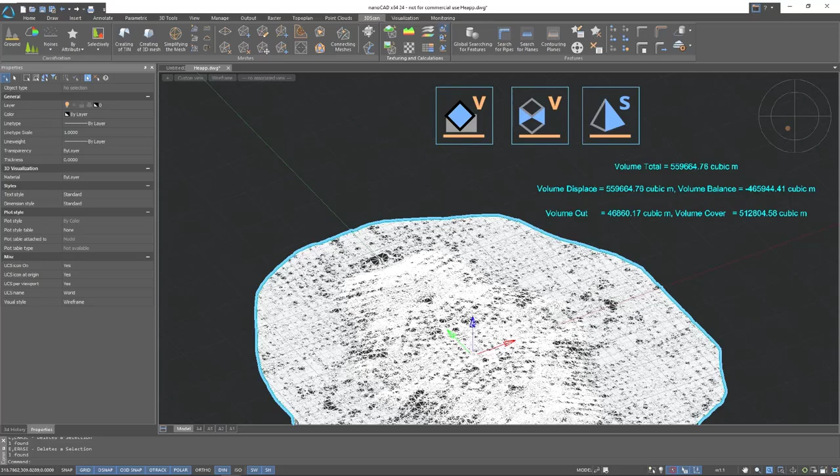Hello everyone. In this lesson, we will look at calculating volumes in 3D Scan.

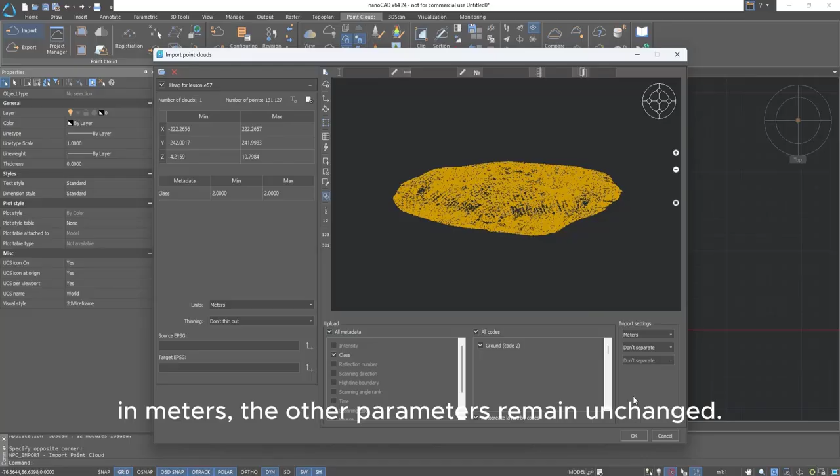First of all, let's import the file I prepared for this lesson. Let's specify that the cloud will be imported into the project in meters. The other parameters remain unchanged. Before we start calculating volumes, we need to build a TIN surface. For this, in the 3D Scan tab in the Meshes group, use the Creating TIN command.

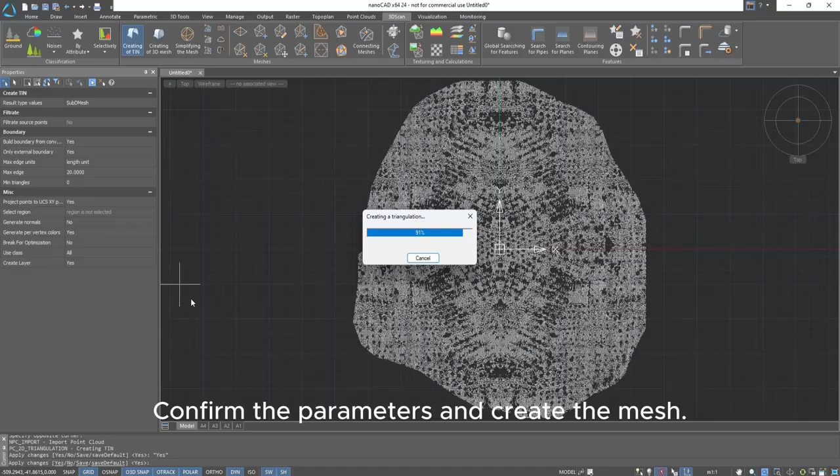In the field Build Boundary from Convex Hull, we will set Yes, only external boundary. Yes, max edge units. We will change to length unit, and the value of maximum length we will set to 20. Let's not forget to disable normal generation, break for optimization, and create an additional layer for the mesh. Confirm the parameters and create the mesh.

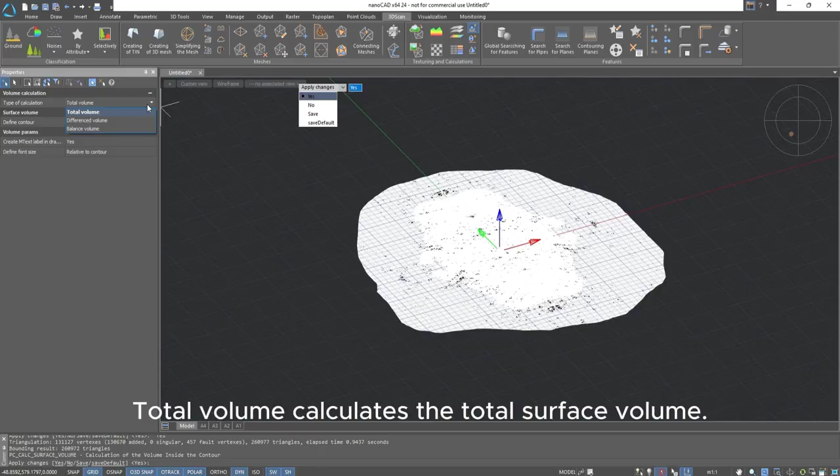Let's now use the calculation of the volume inside the contour command in the Texturing and Calculations group of the 3D Scan tab. There are three calculation options here: total, differenced, and balance. Total volume calculates the total surface volume. Differenced volume calculates the volume of cut and cover. Balance volume calculates the difference between the cover and cut volumes.

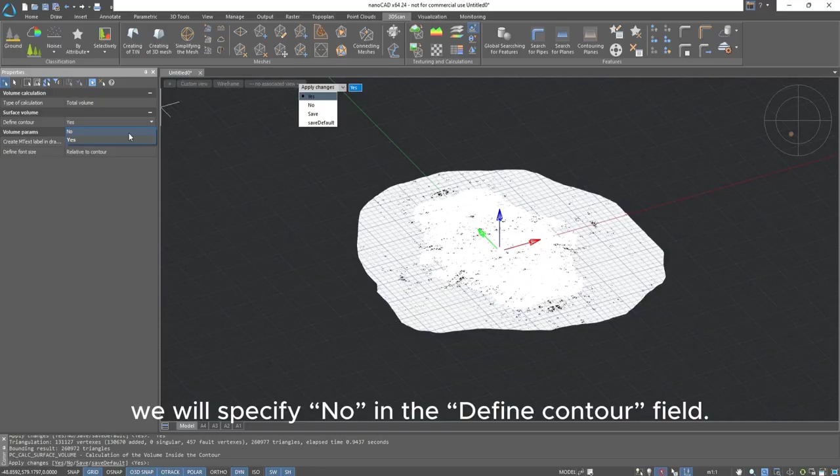For this heap, let's calculate the total volume. In order not to waste time on contour selection, we will specify No in the Define Contour field. We will not change any other parameters and calculate the volume of this heap. The information specified in the Type of Calculation field can be found in the model space. Additional information can be located in the command line.

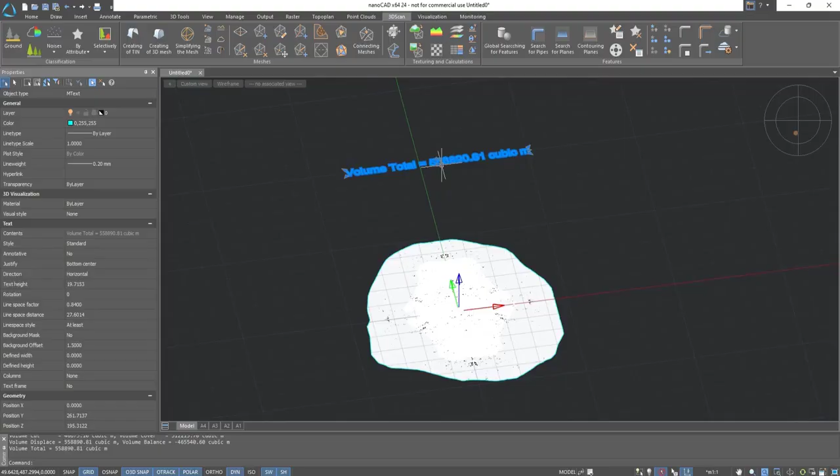Similarly, we can calculate the volume of the heap using other types of calculations. Calculating the differenced or balance volume will calculate the volume of materials relative to the project's plane, which is represented by the grid plane in the drawing.

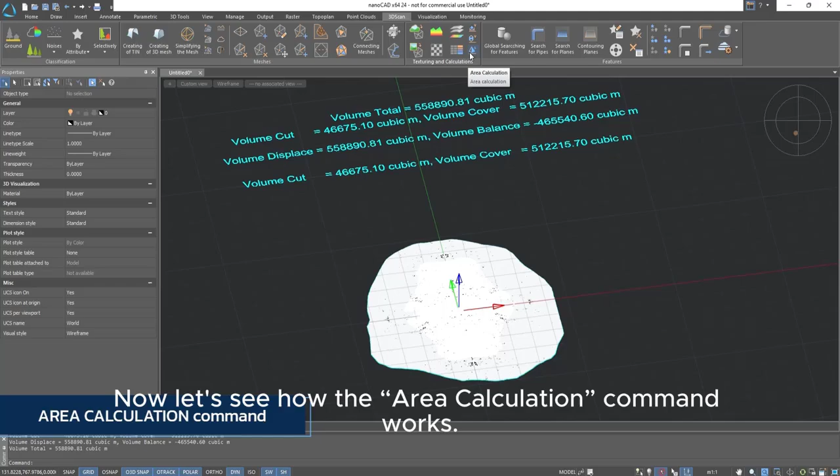Now, let's see how the area calculation command works. We will specify the contour by setting the selection parameter. We will not change the other field values. The calculation results can be seen in the command line.

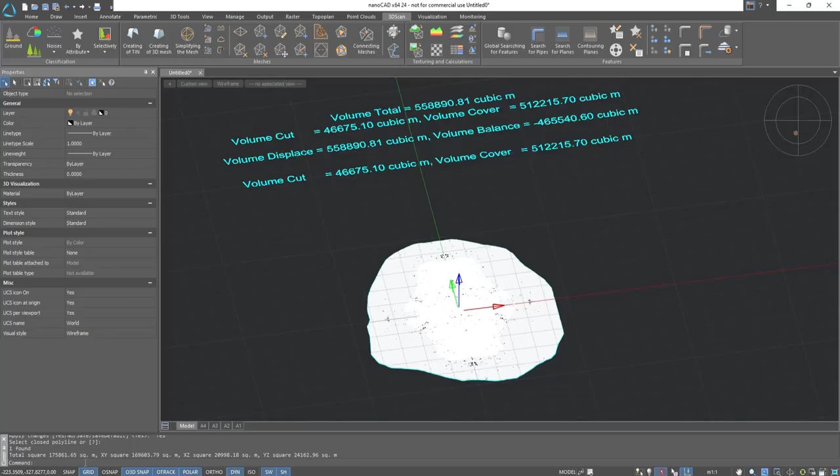Let's now look at a very interesting example to calculate the volume between models. There are two scans here. One was taken at the beginning of the year, and the other was taken at the end. We will import the first scan, which was taken at the beginning of the year.

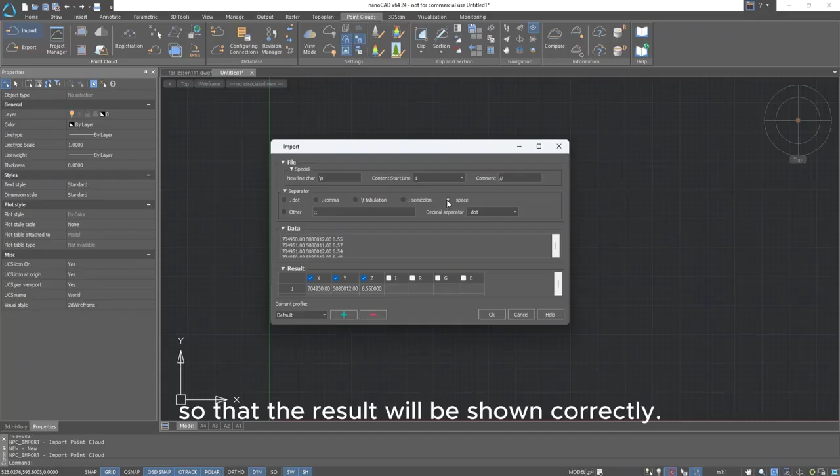In the settings for importing text files, we will specify a delimiter so that the result will be shown correctly. In this case, it is necessary to specify the separator, space. These scans are the riverbed, with the help of which we can calculate the difference between the volumes. Let's give a name for this point cloud, Point Clouds number 1.

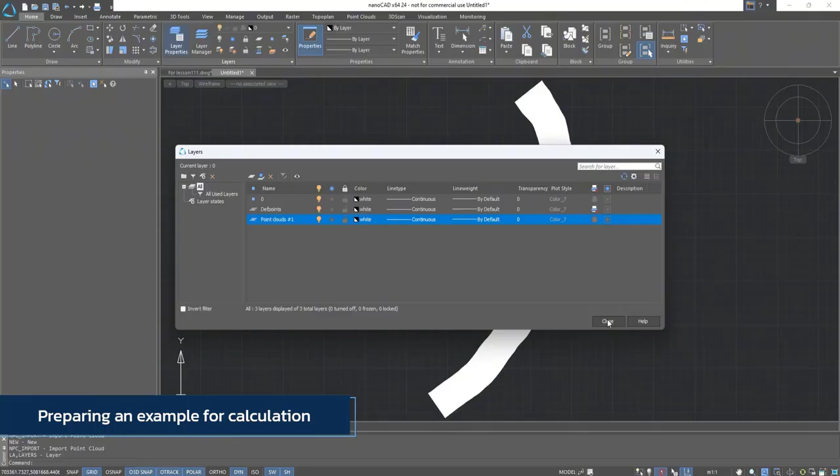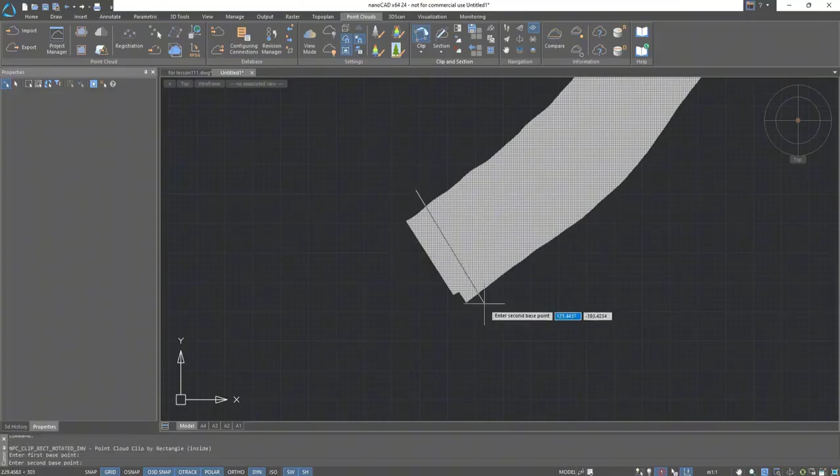After that, let's import the second cloud, which will be imported also in meters. Let's clip these clouds a little bit. Now let's create a TIN surface.

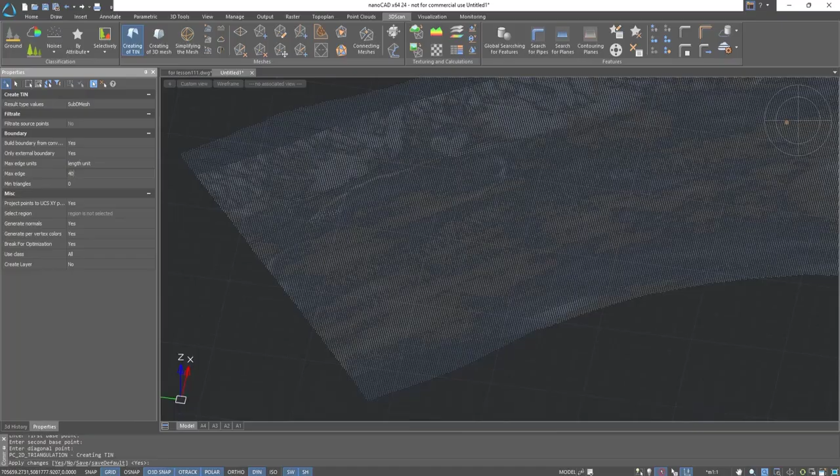And in the Build Boundary from Convex Hull field, we will specify Yes. For the Only External Boundary field, we will set Yes, max edge units. We will change it to length unit with maximum length 40. Let's also not forget to remove normal generation, break the network for optimization, and create a new layer. After that, give a new name for the layer, TIN Surface.

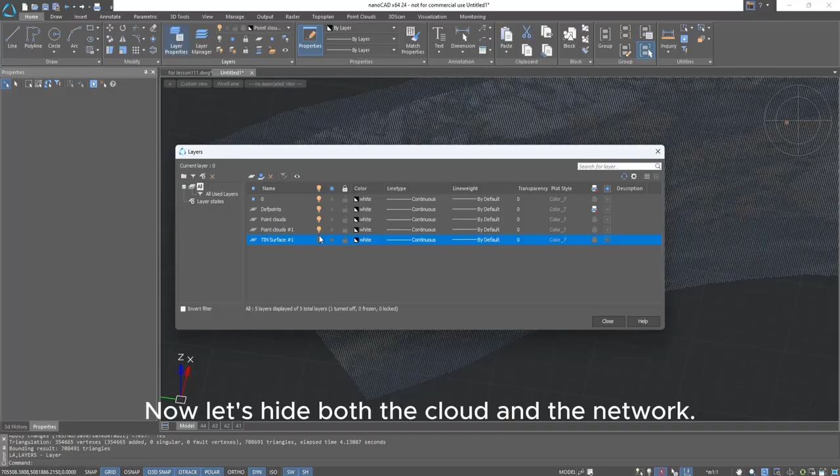Now let's hide both the cloud and the network. Let's create a TIN surface for the second cloud with similar settings. Now let's turn off the point cloud layer and turn on another TIN surface layer.

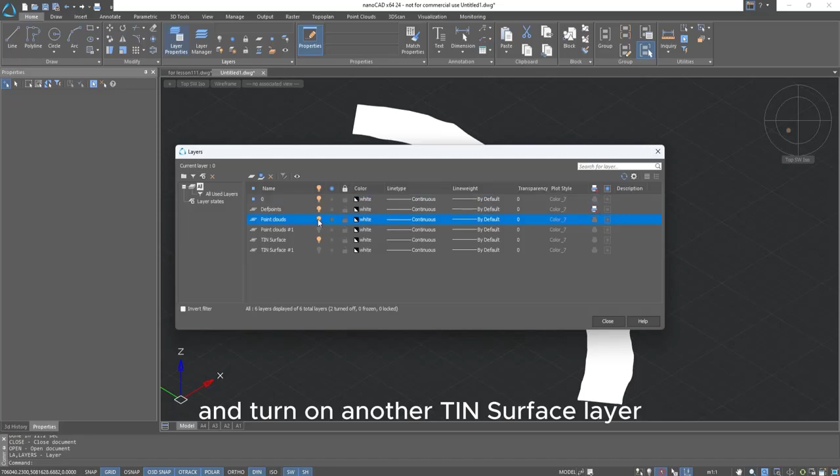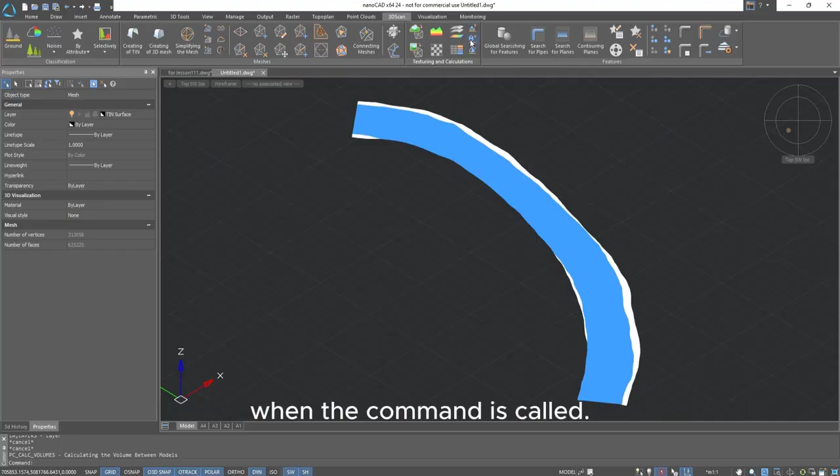Now we need to call the Calculating the Volume Between Models command. Let's specify the mesh that we created last as the plan mesh. I have already selected it in advance, and it will be automatically specified as the plan mesh when the command is called. We will specify the surface we imported first as the actual surface. We have to change the calculation type to difference and perform the calculation.

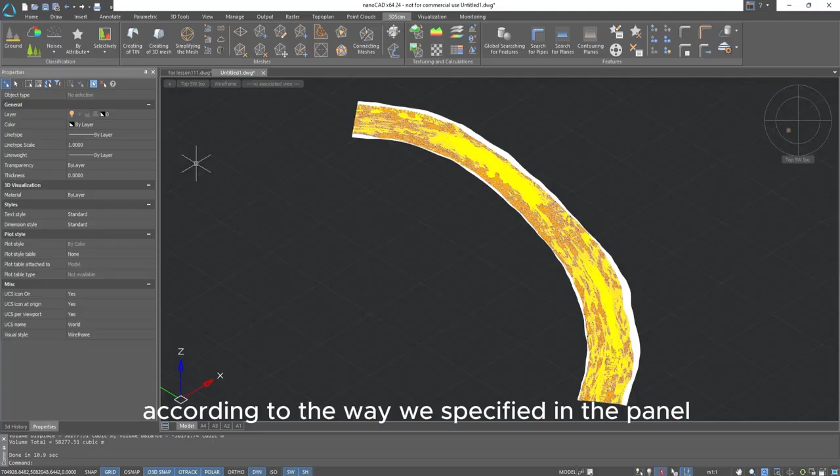Our surface is colored according to the way we specified in the panel on the left, and the calculation itself appears in the model space. With the help of this colorization, we can visually view the changes in relief.